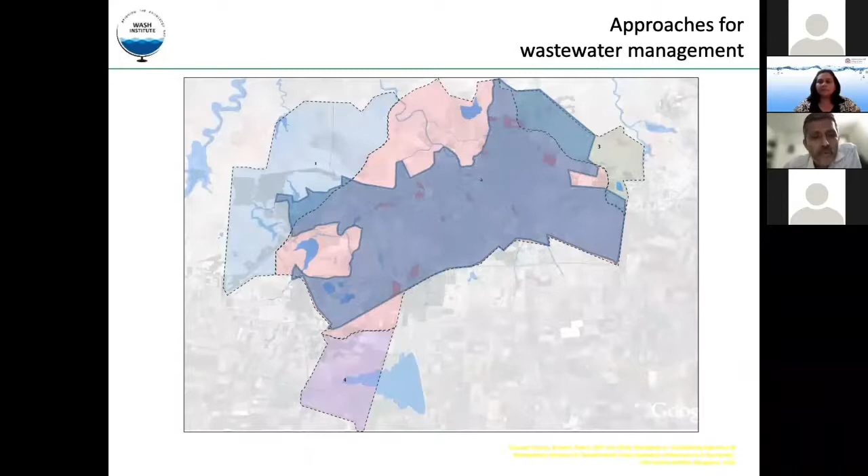This is a very simple map. What I'm trying to show here is a city with boundaries, where this is the core part of the city, which is highly dense and where most of the population lives, and the other areas are literally a peri-urban area or a newly developing area. So this is the place for the highly densely populated area, the core part.

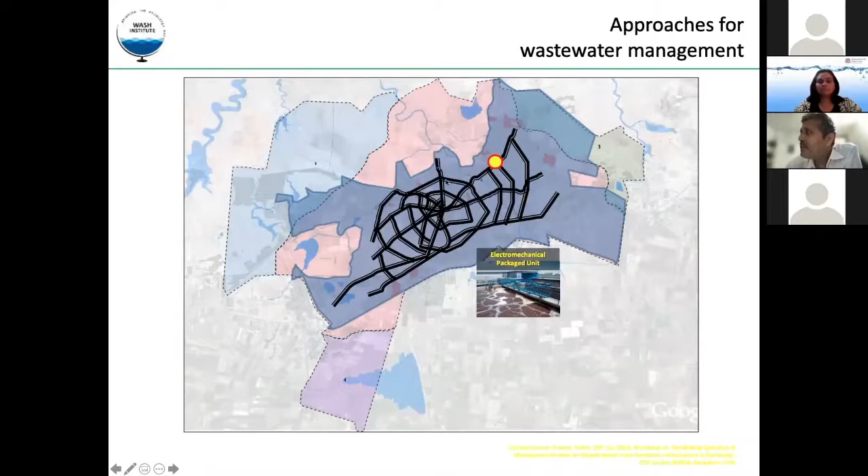Normally people go for a centralized system. For a Bangalore kind of city or a Hyderabad kind of city, the core part of the city is now being covered with the pipe system. This centralized system has a treatment facility where all the water collected from the core part is brought to one or more treatment systems and treated.

Whereas if you see the peripheral area, where there is absolutely no sewerage system, there you can have a simple decentralized system, which can be zone-wise, small cluster-wise, household-wise, or a small institution - anything. Basically the idea is you try to treat your wastewater by yourself, near the source itself.

In the centralized system, you really have to carry the water for kilometers. Sometimes if the city is large and has only one or two treatment systems, they are carrying the wastewater for a very long distance, which means the pipes have to be laid very deep, and that becomes one of the biggest challenges for laying pipes, as well as the cost.

Whereas in the decentralized system, since it's treated very close to the source, people can also take responsibility for it because they own it or are responsible to manage it. So the cost would not be high. It's not only decentralizing the waste management, it is also decentralizing the responsibility. The city doesn't have to take care of it if private people are also managing it. Yeah, this is the second option, as I said.

Then there is a third option, within the central area or maybe in the peri-urban area - on-site facilities. This means within the central core area, wherever there is a low-lying area with absolutely no possibility for collecting wastewater through pipelines, you can either have a decentralized system, as I'm showing with arrows, or you have to have an on-site system.

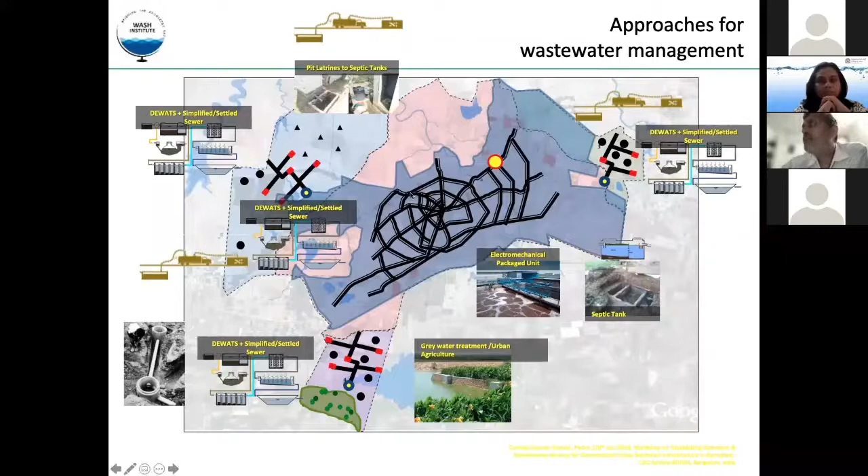So this is a little challenge there, but as the gray water is not much concentrated and fecal contamination is less, that's the reason we need not worry about this too much actually. It goes to the STP, is treated there and discharged into the water body.

Decentralized, yeah, of course. As I said, in the centralized system, because you have to carry the water for a very long distance, you also need to provide the pump station. This is another biggest worry, because if the pump station does not work, all the wastewater backflows into the household actually. So that's the reason most of the time, if you would have seen, many of the manholes are really backflowing and flooding and all those things. And running this pump station is also a very big maintenance task. It also costs a hell of a lot of money actually.

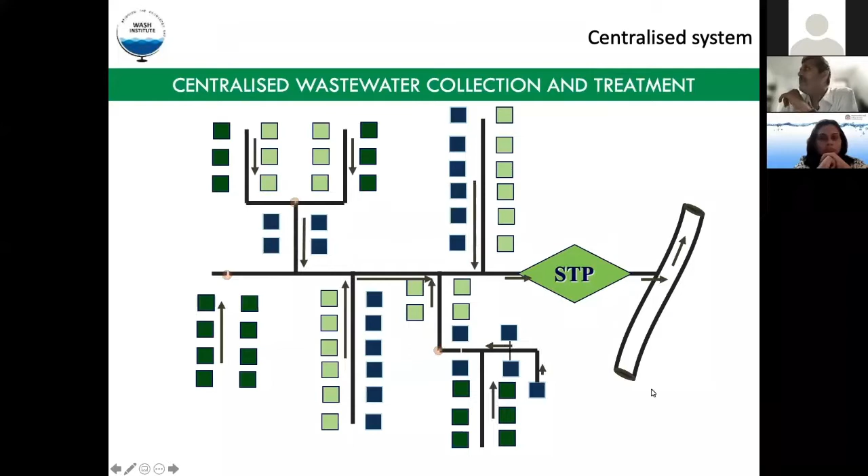So this is a pictorial view of a centralized system. And the advantage and disadvantage: if you see the centralized system, the advantage I would call is that there will not be too many treatment systems, only one or two treatment facilities based on the topography and the pipeline slope. So that's the reason you don't have to maintain so many facilities. Maintenance, cost, and area requirement.

Again, if you really go for many treatment facilities like a decentralized system, the land area requirement within the city is sometimes a very big challenge actually. And people also sometimes do not want to have a treatment facility near them. So that's the reason having it in one place is what we call an advantage.

But at the same time, one disadvantage is the big cost, because the larger pipes, deeper pipes, and the type of pipes we use, all those things cost a hell of a lot. And operation and maintenance of a deep sewer system is also one of the biggest issues, because the deeper it goes, getting into it is really difficult.

So if you've seen, so many people are dying while they are cleaning the sewer pipes actually, because once they get in, they really don't know how to come out. They have not been trained, or there are many issues. So now the government is also working towards that, thankfully.

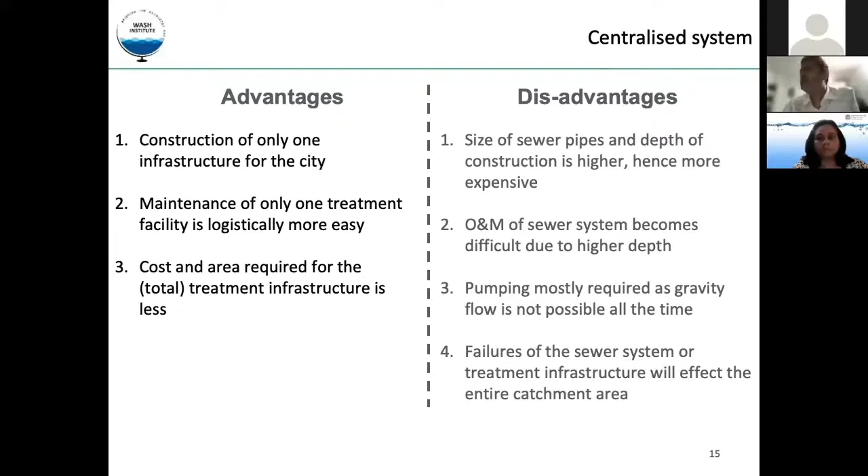Of course, if there is a pump failure, the entire area gets affected actually. Near the treatment facility, if by any chance the last pump station doesn't work, the whole catchment area before that pumping station gets affected, and water will flow all over. I have many examples of success and failure, but in the interest of time, I will not get into that.

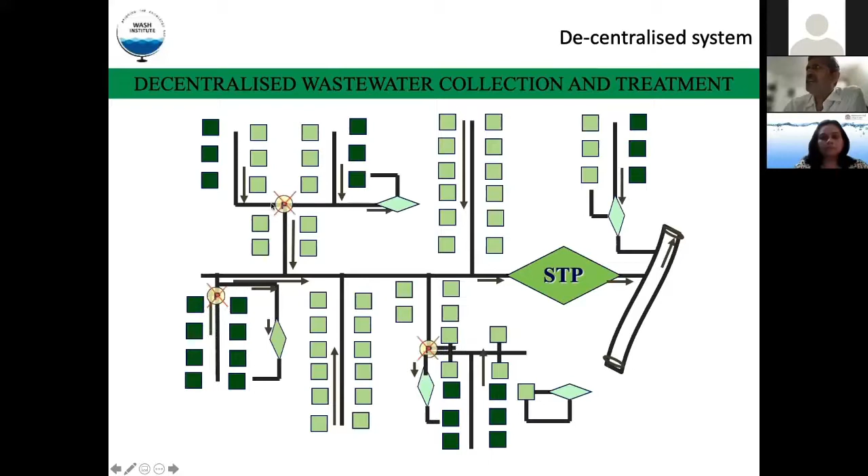So the next one is a decentralized system. In the centralized system, as I showed, everything goes to one place with the pumps. In the decentralized system, instead of these pumps, we can have a treatment facility itself, like you see here, so that we need not carry the wastewater to one single STP. This area can be treated in this area itself. This area can be treated in this treatment facility. So likewise, all these areas can have their own treatment system. This is the beauty of the decentralized treatment facility.

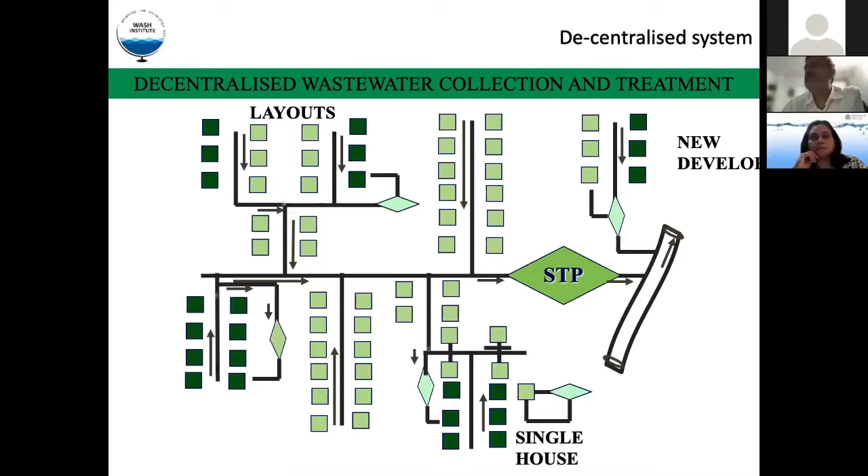Of course, one of the biggest challenges is who will operate and maintain this facility. If that clarity comes, who will invest in such a facility, then it is a very efficient system. Again, the advantages and disadvantages are exactly the opposite of the centralized system.

As I said, it is beneficial from the construction point of view, we don't have to go deeper. So I would say that's a big advantage actually. Operation and maintenance also then becomes easier. The cost is not much, because the sewer system does not go deeper at all. And in case any sewer system is under maintenance, the entire area doesn't get affected, only that particular cluster with the treatment system.